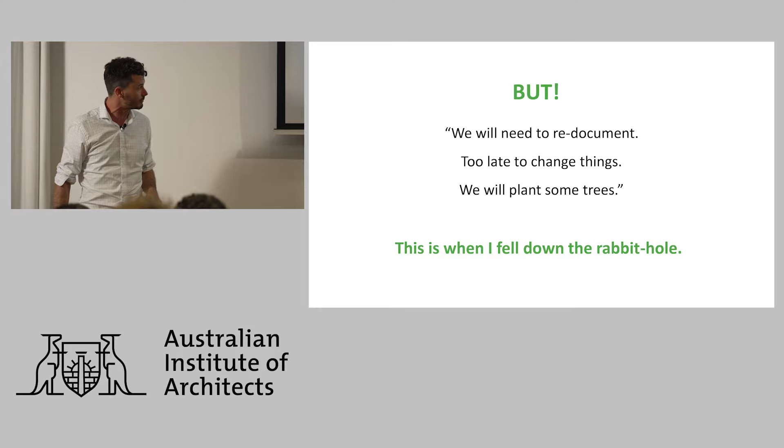And that was where I fell down the hole properly, thinking, okay, there is a problem here systemically with an architectural firm who was interested in environmental stuff, a client who was engaged with it, the builder was engaged with it, and yet we ran into that hurdle.

Cut through to where we are now. I started Carbon Trace last year off the back of that carbon nerding that had been rattling around in my head for 5 years. And where I'm up to now is how you build the link between embodied carbon or greenness and the financial sector. Once you start to connect dollars with greenness, you really have a starting point.

So today I'll talk about the live solutions and what you can do as a designer, and report on the optimistic progress from down the bottom of a hole, which some of you hopefully come down the hole. It's a great place, but it can be pretty overwhelming. So come up for air every now and then, otherwise you'll end up talking with Ross at the Perth Design Week.

So I'd just like to start by saying the commercial sector and the residential sector are different beasts. And we've heard the rest of the series has been commercial sector focused. I am a residential builder building 1A, like one-off homes, and that is a bit of embodied carbon that really needs to be talked about and come to the front of the conversation, because it is getting left behind.

And it is the urban sprawl and the mum and dad home is a very different paradigm to a project where there is a consultancy team, where there's a whole lot of backup and resource and energy, when it's just you as a designer, a project, an Excel document, and the web to get your embodied carbon modelling done. It is fundamentally a different landscape.

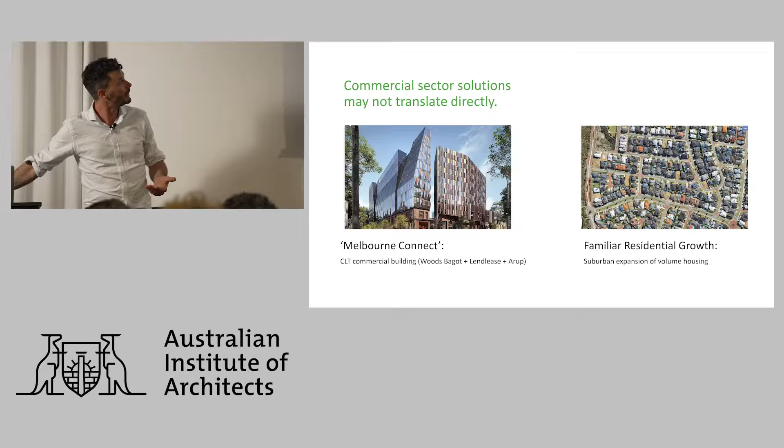1A building stock. We need to build 200,000 homes every year for the next 5 years to reach our housing shortage goals. It's a sector that's dominated by fairly low sophisticated organisations potentially, tradespeople. There's white collar, there's blue collar, and there's no collar, as I affectionately refer to some of the builders that I've worked with. There's also a fundamental difference in that suburban homes or 1A stock broadly has a fairly common typology repeat, particularly in that volume space.

From a bang for buck point of view, this humble home is a different beast to the architectural one, but actually this is what's doing the damage. Our little architectural world has got a percentage of it, and architectural design has a great need to really push the boundary in an embodied carbon space. However, you need scalable ideas and solutions that engage everyone, rather than just a cottage industry of hardcore LCA analysis of a few things. You need to get the whole world talking about this. So within the residential sector, there is a sector within a sector.

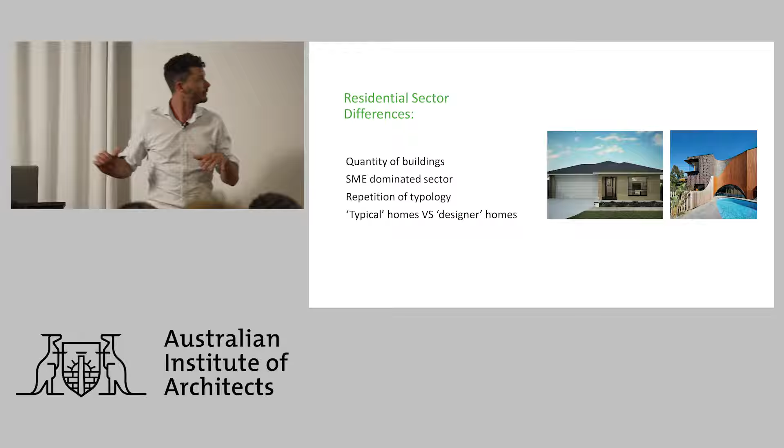The need to measure - if I'm a carbon nerd, Ross is a measurement nerd, and I think that's a good, happy place to be. Measurement is a design tool. Design is a series of compromises, and unless you have measurement as a tool, you can't make informed decisions, particularly when it comes down to embodied carbon and therefore cost. We really need to be measuring embodied carbon, and that's what this series is all about.

Rules of thumb are great and have been around since we've been building homes, but they need to be backed up with numbers and a metric. At a very high level, embodied carbon, our carbon footprint, and LCA analysis - modules A1 to A5, B, C, D - that's great. What it comes down to is how much stuff have you got and what's the impact of the stuff. Stick those two bits together, and that's where you get to your impact, your embodied carbon.

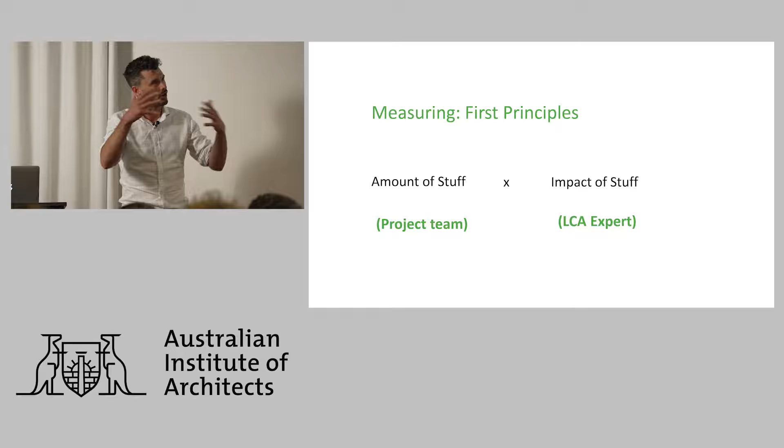When it gets really complicated and confusing, I find dumb builder's logic - work out how much stuff you're using and then the emissions of each bit - is a way to bring it back down to earth. The amount of stuff in a building is very much the domain of the designer. Understanding the impact of the stuff and the intricacies of system boundary - what's going to happen to the project in 50 years in landfill - is relevant subject matter, but that's the realm of the expert, the specialist.

I think we have to appreciate that as designers or builders and practitioners, we should focus on what we're good at and capable of doing really well, which is measuring the amount of stuff in buildings. And that's certainly where I began my journey.

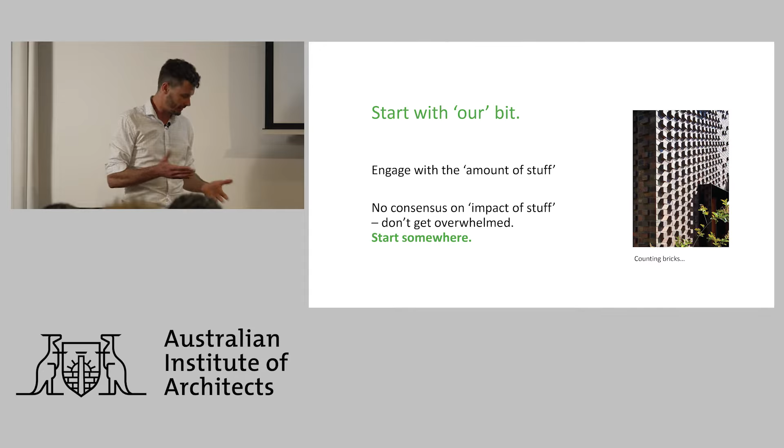Literally count bricks. In the embodied carbon world, where no one can agree on how much carbon impact a brick has, or a cubic metre of timber, that is all totally elastic. The only real truth is that there are X number of bricks in a home, X amount of concrete, and 400 lineal metres of flooring - those hard points form the foundation of measurement.

From that, you can apply your impact factors and start to get down to the landscape of how you factor in recycling. But sometimes don't get overwhelmed - it is just about the amount of stuff.

There's also the idea of designing out carbon rather than specifying out carbon. Designing is the bit where the fat red pen and the crayons are out - that's where the big savings are made. Specifying out later by dropping in low carbon concrete is great, excellent, has to happen, but that should be a secondary consideration. I think the key is early design decisions.

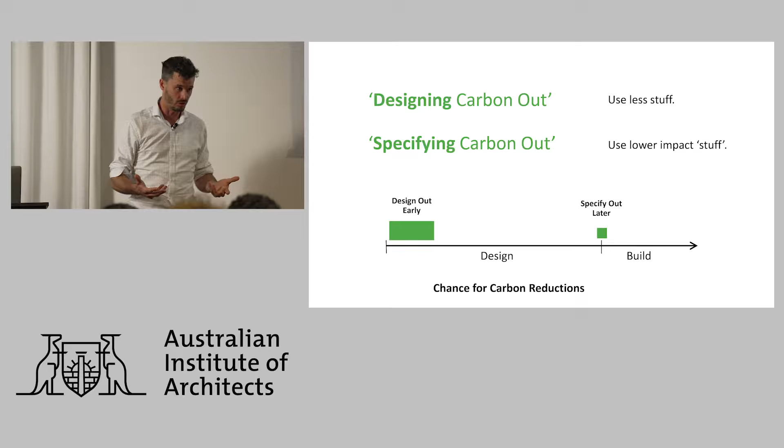That ties back to where I started in 2019, asking: have we thought about a screw pile solution to a site here? From a build point of view, that was great because we were next to adjacent footings and avoided underpinning and all that. But how can you start to engage at that feasibility stage with the implications that might come about from one decision over another?

This mimics the commercial sector paradigm - the structural system, the outside of it, the footings, the envelope, is doing the guts of the work. If you start by measuring concrete, steel and masonry and get the outside of a residential building calculated, you're 60% of the way there. You can get really lost really quickly when you start trying to work out how many litres of paint are in a room, how many coats they put on - you can really get down the hole quickly.

That's great, and that's the role of an LCA analysis conducted fully and comprehensively, but that's not a scalable analysis mode. Where I've ended up in my journey is saying, let's pick up the big stuff first, the low-hanging fruit, the stuff we can get our hands on, and then worry about the finer detail later.

From a designer's point of view, if measuring is the key and understanding how much material is in a project, then it's about having access to that measurement at a very early stage so you can make those decisions with real numbers. I think it's of less significance to get to the end of the project, building's about to start, and say now we'll do an analysis, we can do full takeoffs and work out how much material there is. Actually, we've missed the boat, and those decisions have flown the coop.

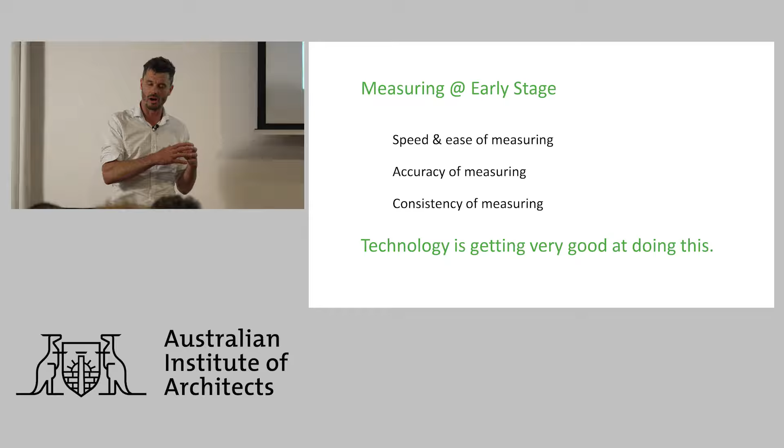So the challenge for designers is how do you have a data flow of relevant, project-specific material quantity at a very early stage. When a design has to be dynamic, you have to have that fat red pen going. How can it be accurate? And more importantly, how can you be looking outside of your office and saying, hey, here's the measurement we get. What do they get? What do they get?

Because if 10 people are measuring buildings in different ways, getting different results because they're measuring in different analysis modes or with different emission factors, suddenly you start to undermine the credibility of what it is you've done. You get 10 different answers - well, which one's right? It may be that none of them are right or wrong, but depending on how zoomed in you get on the analysis mode, you might get very different results.

So what we've come to realise is technology is getting good at measuring at an early stage, and we've been trying to leverage that through CarbonTrace, which started off as a bill of quantities tool for early-stage optioneering, allowing designers to see, actually on this job, because the soil's rubbish, because we're in Brunswick and it's 3 generations of rubbish tip before we get into clay, screw piles would be a really good idea here rather than digging 1200 mil. So that's where it started.

The way it worked essentially is design teams would put in very rudimentary building envelope values, floor plate, wall area, and get a carbon output for different structural types and material types. What happens if you change from brick veneer to weatherboard? Bang, 2 seconds, there's an output. All right, well, I'll put that in my little red pen.

We evolved that to realise we could run that from a NatHERS certificate. For those who aren't aware, a NatHERS certificate is a mandatory part of a building permit. You get an energy consultant to prepare a certificate that says your building envelope is compliant with the National Construction Code, got enough insulation, and so forth. A NatHERS certificate will basically measure heat flow through the envelope of a building to see how warm or cold the building is. Sweet.

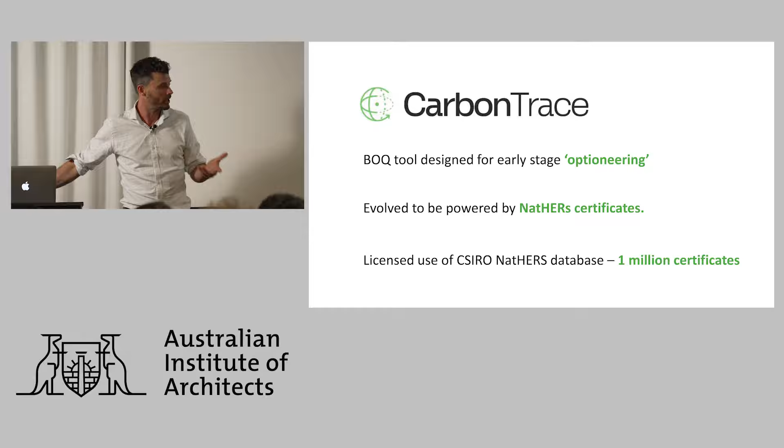project-specific data. We went to CSIRO and said, hey, we've got this thing. And they said, oh, this is pretty interesting. And then we entered a license agreement to process every NatHERS certificate that has been produced. So that's 6 years of data, 1 million data points, and we ran them all through our algorithm.

What that got us to dial into is this - each grey dot is a postcode, and behind those postcodes sits that 1 million data points of property information. From that we plotted, and our algorithm plots out intensity per square metre against the area of the house. You can see here, this is a 70 square metre house, and it's got a really low embodied carbon intensity. There's a few real bangers up the top there, and the guy who did that one's in trouble. But the point is, you can start to see, that's 1 million data points.

That's every home built in the last 6 years, splattered out on a graph, which means you can start to plot the average. Once you know the average, you've got a benchmark. Then you can say, all right, if we're just analysing with a NatHERS scope, I know my building is here. And that's my NatHERS certificate compared in exactly the same way to 1 million other NatHERS certificates.

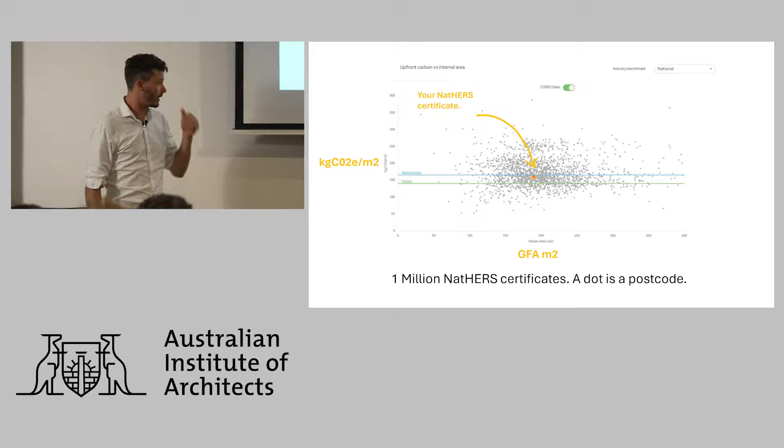And that then means you've got a way from a designer, and the way the tool works is you play around with very basic stuff. This is the low literacy stuff, trying to make it accessible to everyone. You play around with these features and you get performance shifts.

Too deep. So you play around, you can drop down with, again, the commonplace wall types, ground floor structures, roof, and all the various material groups. You can change the suppliers, and that's got some EPDs behind it with low carbon concrete, low carbon brick, and what have you. And then you modify those, and I'll show you on the next slide.

There's a button where you calculate, and it will spit out a hotspot analysis, and it'll give you an absolute value derived from that NatHERS certificate. You fiddle around with these numbers, press it, and you start to see a metric change.

Maybe better explain an EPD as well, because not everybody will know what that is. You're right, I'm too nerdy for this. So an EPD is a...

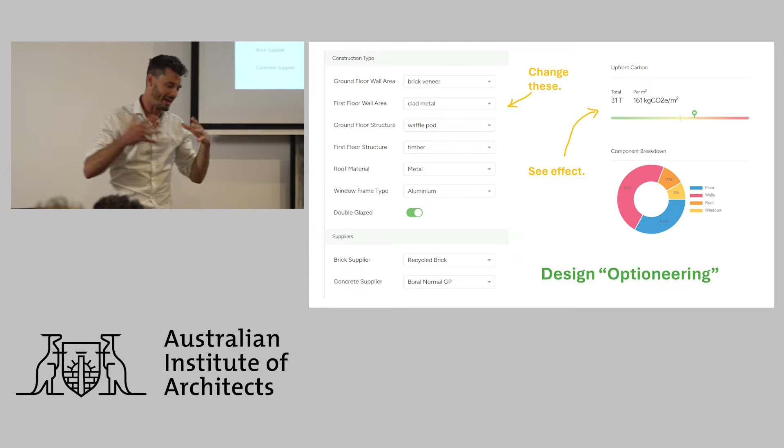Way of measuring the carbon impact of a particular material that's been prepared by, say, a concrete supplier. They will analyse their particular concrete blend and say this has got an impact factor of 300 kilos of CO2 for every cubic metre of this concrete that we sell.

And lots of suppliers are starting to get on board with producing lots of EPDs, and we're using that so you can, if you start to play around and use one of Boral's alternative mixes, it has a different emissions factor. So it can show you what's starting to happen if you change suppliers. It stands for Environmental Product Declaration. That's the short answer to EPD.

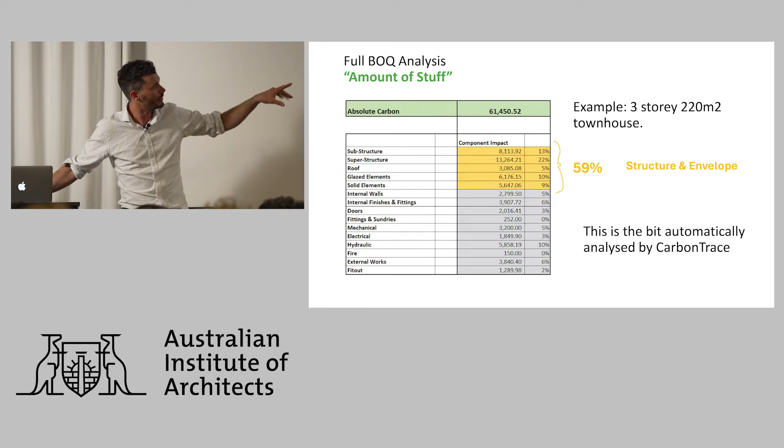We did a full analysis to see how much of a NatHERS certificate we were picking up. And again, it's sort of aligning with that commercial story, which is we're getting the guts of it in that superstructure and that external facade system. And that's the bit which CarbonTrace is doing. So a NatHERS certificate will give you an LCA analysis on any building type with a NatHERS certificate.

Does it work on the really unglamorous bit of the building stock? Because theoretically, an architect should be able to get a client to get an LCA consultant on board, do a full analysis, no worries there.

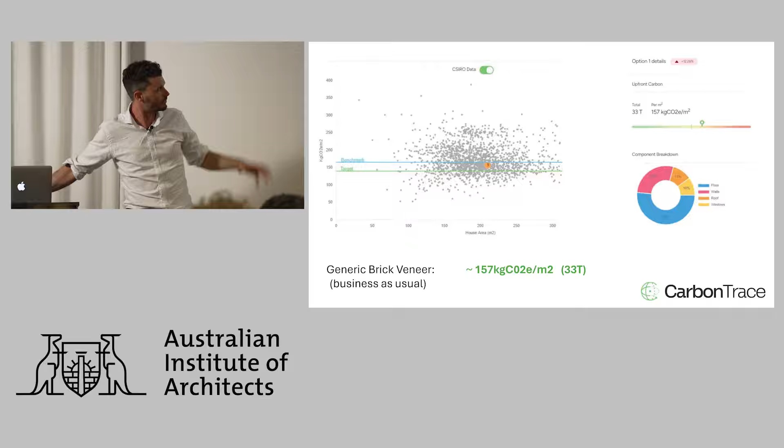If I change from brick veneer to metal clad, I've essentially removed the brick bit of the equation. Brick is a relatively high intensity thermal mass embodied carbon product. So let's get that out of the equation for now.

Change to metal clad, and you can see that there's a shift. And if you change to fibro or timber, it equivalently maps that, and you literally see your orange dot start to move in a downward direction. You change from waffle pod to strip footings, that is, you're getting a lot of the concrete out of the job, you're starting to see it drop right down.

That should be triggering all of the design questions you should have. Why are we going strip footings? Why wouldn't we? Why would we go concrete? Why wouldn't we? But at least you've got some numbers and you can see there's actual material change in those big decisions, which you might otherwise just be like, oh yeah, waffle pod, no questions asked.

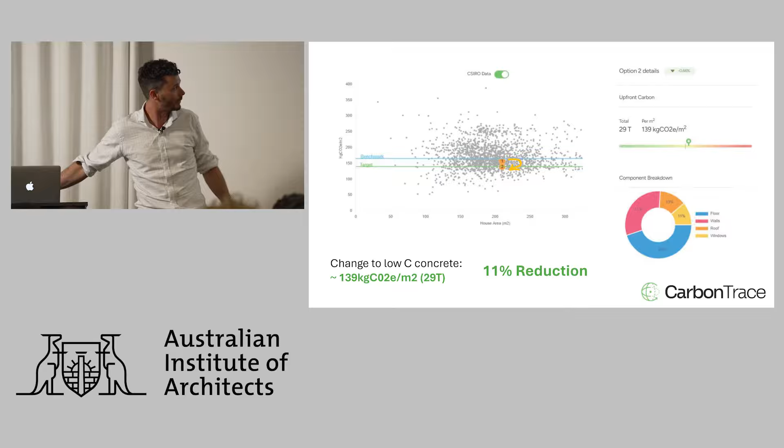If you don't want to change anything, you want to keep it really simple, you just want to change supplier. If you change to a low carbon concrete, a 30% blend, that was, I think, what John was talking about, you'll get a 10% reduction. That's a phone call, and that's dropping in the specification. We either want this supplier, or it might be, we don't care which supplier, but they need to have an emissions factor of X, and you work out what that is. And that's where EPD data comes in.

You do the same thing for brick, keeping your brick veneer on a waffle slab, but you've changed to a low carbon brick supplier. You've asked the question of the supplier, and they've said, oh, I don't know, do we have an EPD?

Those sort of things are going to come out of it, which is great, because you're then extending the conversation beyond our little world. And if you push those questions up the supply chain, that's how change happens more broadly.

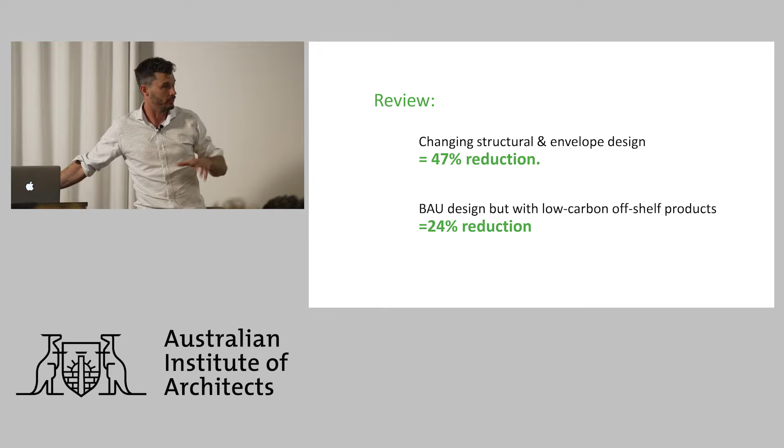So the takeaway from that is fiddle around with the structure and the envelope, because that's the big ticket items, and you can do that quite quickly for serious, meaningful results. You can also start to change specification if you want to do nothing else, and that'll help. I think the literacy was the key thing there.

But I want to talk now, and this I need to see - how are we going for time, Ross? Okay.

There's a reason why measuring has become relevant, and it's no longer just us thinking, yes, we want to build low carbon, yes, I've got my little goals and my little Excel spreadsheet. There are two things which fill me with great hope that big progress is happening in the short term.

The first of them is mandatory corporate reporting is changing. That means big businesses, that means banks, that means developers. The big end of town is now mandated to report on their scope 1, 2 and 3 emissions.

Now what that means in real terms - I'll zoom out - scope 1, 2, 3 are your organisational carbon impacts, I suppose. Scope 1 and 2 is pretty easy: how much diesel do you use and how much power do you buy? And scope 3 is everything else.

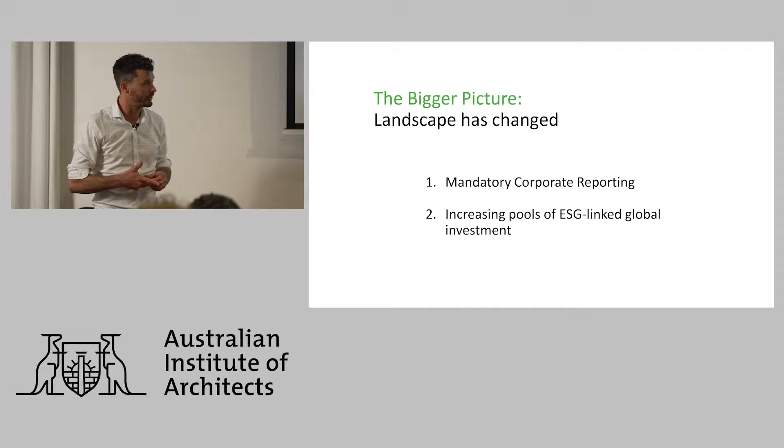And for banks, part of the everything else is anyone they lend money to is their problem. They have to report on that, their loaned emissions, in a particular way. Same with anyone else attached to building - volume builders, the big guys, the developers - they are all now having their board report on embodied carbon in the same way they have to report on their financials.

And if they get that wrong, they get sued. So corporate boards are getting very worried about how they are going to approach scope 3 reporting, which is essentially - let's use them interchangeably here - scope 3 is embodied carbon.

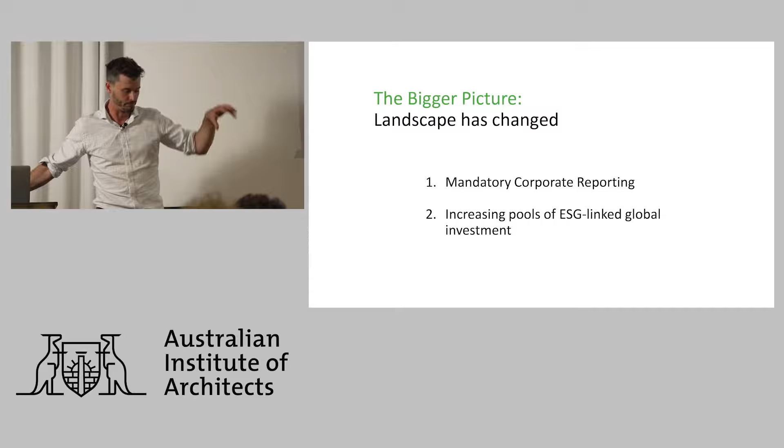And the second big thing is there are lots and lots of pots of investment funds that have big bundles of money that can only be spent on green projects. I'll talk on both these things in more detail in these two slides.

So embodied carbon reporting is coming next year, might get pushed to 2026. Read that guide, it's a ripper. And if any director of a big organisation hasn't read it, they should.

Essentially, the big end of town has to get their heads around numbers now. They are liable, they need to measure. Now, they're not in the business of building homes, they don't know anything about it, they don't have any data, they're not close to any bit of information about embodied carbon. This is why they're worried, because there is not a data flow at the moment of scaled embodied carbon information going up the food chain.

So they're worried. And the second bit of the equation is the green bonds. This blew my head a little while ago, and it did take me a while to digest, so apologies, this is a dump. But there it is, you're all smart.

You'll work it out. Green bonds - our super funds, institutional investors are being told by their members: do not invest in fossil fuels, invest in sustainability projects. Super funds are saying, all right, that's what they want, that's what we'll do. So they've now got big bits of money that they cannot invest in anything other than sustainability. And these pots of money are getting bigger because more people are asking for this sort of investment. This green bond market, as opposed to a normal vanilla bond market, is changing altogether.

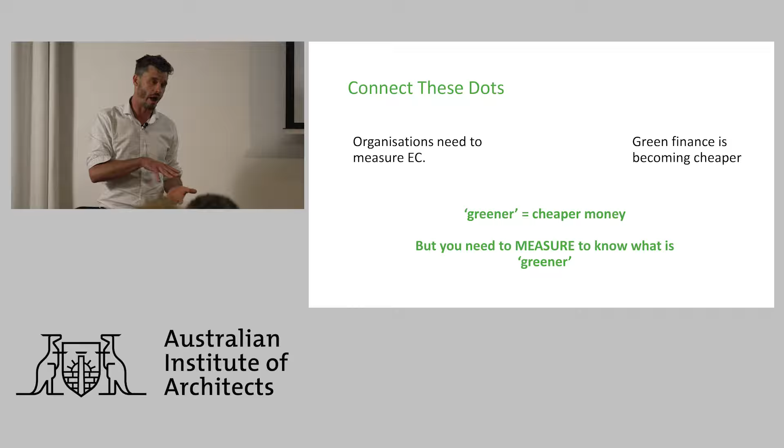And that's my next slide. Most importantly, you have to be able to measure it in a way that the banks can audit it. It has to be robust data, it has to be consistent, it has to have a methodology that will stand up to interrogation from ASIC, the guys that look after all the big companies, because they're going to be the guys saying, hey, is that greenwashing? Are you sure that's greener? And if they're wrong and they're making a claim like this is heaps greener than it was, and they don't have a methodology behind it, that's a big problem. Greenwashing is going to be the next big ticket item, I think.

And what that's looking like is at the top end of town, banks have realised, hey, if we can measure that the projects we're loaning money to build are greener, we can borrow greener, cheaper money for that little package of projects. And with that money, well, we got a few more profits. I know banks have got their back against the wall, they're really skint, but maybe they could stretch it and expand their green loans offering.

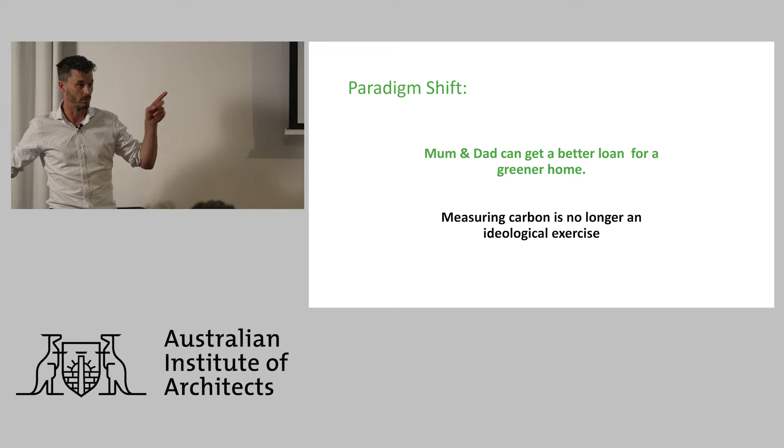So ultimately mum and dad get a better mortgage because they've said this home is the one we want, and we want it because it's greener. And we know that if we can get - this is back to our NatHERS thing - this is our project here. Hey bank, we've shown you that we're 30% below, we're performing better than the rest of the country by 30%. That aligns with the eligibility criteria of a global metric called the Climate Bonds Initiative - write that one down, that's a really good one to know about. Which means, hey designer, if you can get us in this green bit, we can go to the banks and we've got a way of proving that we're a greener home. And that means the banks are like, okay, you beauty, we'll put you in our green pot and we can get some better money for that, and then hopefully that gets passed on to mum and dad.

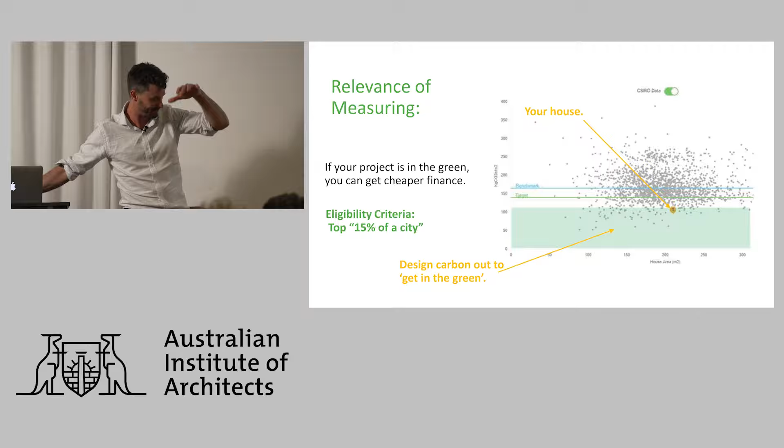So I think the main thing - and apologies because this was a segue off measuring, but really relevant to contextualise the meaning and the reason to measure - it does all start with the nuts and bolts, it does all start with counting bricks. Don't get too overwhelmed because it's easy to just turn off and be like, this is not core business, I'll worry about it when I have to. The reality is the have-to bit is now for the big end of town. So businesses are now saying, hey, I can be a better business, I can make more money as a lower tier business if I am ready to engage with the needs of these upper tier corporate organisations. So it's shifting from ideology to dollars, which is what's going to turn everything on.

So yeah, quantify the carbon impacts. If, as a designer, just start measuring bricks, concrete, steel - not at a cost level, just how much physical material am I putting in. Then dip your toe in the EPD world. Then ask the question about what do I think about carbon offsets, what do I think about biogenic carbon, what do I think about end-of-life recycling. Have all of those big questions, but start somewhere easy. Don't try and boil the ocean, just do something and start somewhere. Thanks for listening, apologies.

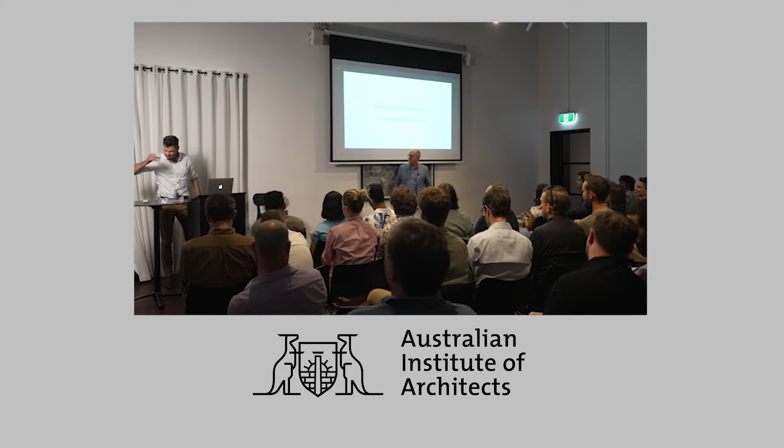Well, that got serious, didn't it? Very grown up. Starting with a small house building enterprise and ending up in the world of green bonds and financing and all the rest of it - quite a trajectory for a young man. See what you can do with one million data points, crikey, and build a whole new world on the basis of it. Well, that was fantastic, thanks Tom.

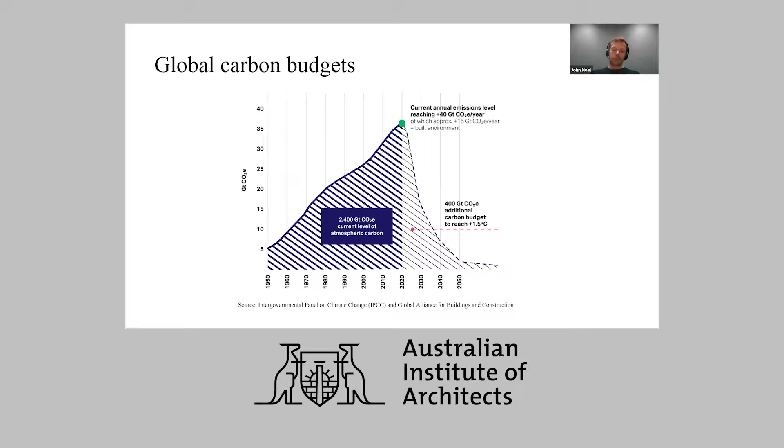The construction industry, as most of you will know, is a significant emitter. We're responsible for approximately 40% of emissions globally, and that's broken down into building materials and construction at about 11%, with the rest made up of buildings operation, so 28% plus 11, roughly about 40, which is significant.

If we look at how that's broken down between embodied carbon and operational carbon, we'll explain the difference for anyone who may not know. Currently, and it depends on the source, but according to Arup a few years ago in 2019, the breakdown was approximately 16% for embodied emissions and 84% attributed to the operation of buildings. That's very likely to change significantly as the grids clean up and operational systems become more efficient. We're looking at a projection, again by Arup, by 2050 of reversing that.

So 85% sitting in embodied carbon versus 15% for operational. That means embodied carbon, which was for a long time the elephant in the room that wasn't being addressed because operational carbon was a larger piece of the pie, is now being actioned. That reveals the embodied carbon volume, which needs to grow relatively in terms of percentage, and there's a huge potential there for reductions. As a structural engineer talking to you about carbon reductions, that's predominantly what I'm going to be focusing on today: embodied carbon.

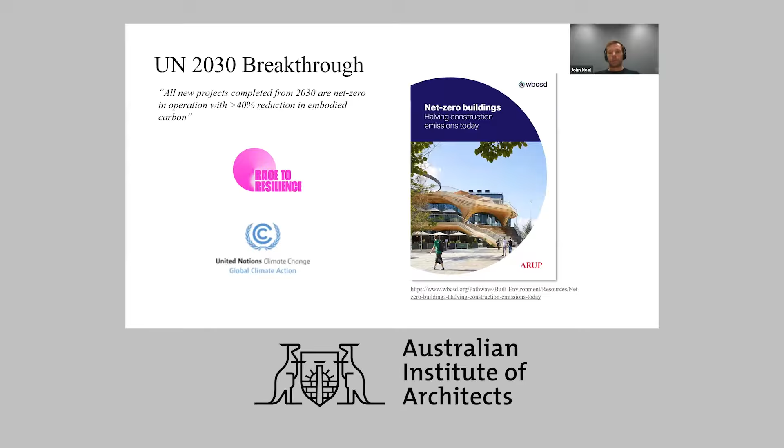At COP27, Arup made a public commitment in conjunction with a number of other bodies, Race to Resilience, under the umbrella of the United Nations, or this broader UN 2030 breakthrough group. We made the commitment that all our new projects completed from 2030 will be net zero in operation with at least a 40% reduction in embodied carbon. That's very much to try to meet the demand for that curve reversal I first showed, halving our emissions by 2030 and getting to net zero by 2050. Along with that commitment, we issued, in partnership with the World Business Council for Sustainable Development, a joint publication called Net Zero Buildings: Halving Construction Emissions Today.

I won't go into too much detail other than focusing on A1 to A5, the product and construction stages. I might as well break them down now. A1 is raw material supply, A2 material transport, A3 manufacturing - so it's all the energy and therefore emissions associated with those processes. Then under construction, A4 is product transport, and A5 is construction and installation. That's an internationally recognized standard, so if we all talk the same language, we can agree or disagree on quantities, but at least the framework is consistent.

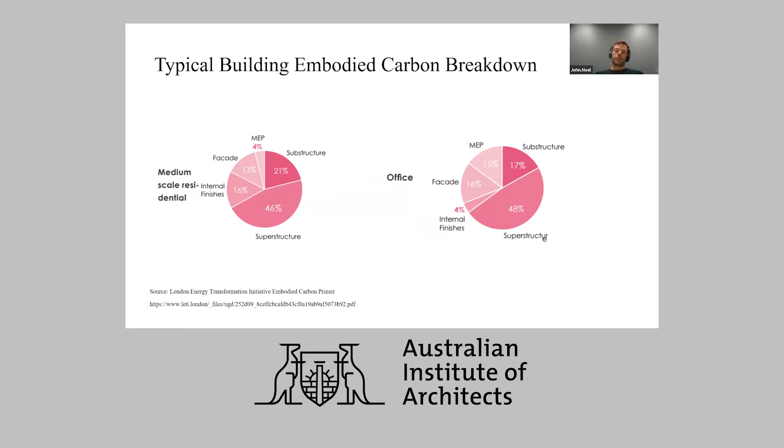So where does that carbon come from? Well, mostly from the production of the materials that make up the elements that we use in construction. Steel contributes to about 6% of the world's greenhouse gas emissions. And if we look at where those emissions occur, there's emissions associated with mining or procuring recycled steel, but the bulk of the emissions sit with the process of manufacturing the steel. So if you're using a basic oxygen furnace, the chemical reaction and the fact that you're heating up the steel.

That's the energy hungry process, and that's where most of the emissions can be attributed to. If you're using an electric arc furnace into which you feed recycled steel, that's typically 50% more efficient, but it is still energy intensive, and then the rest is made up of transit, use, end of life. Just back to the basic oxygen furnace versus EAF: in Australia and worldwide, it's about 70% for basic oxygen furnace production, and about 30% for electric arc.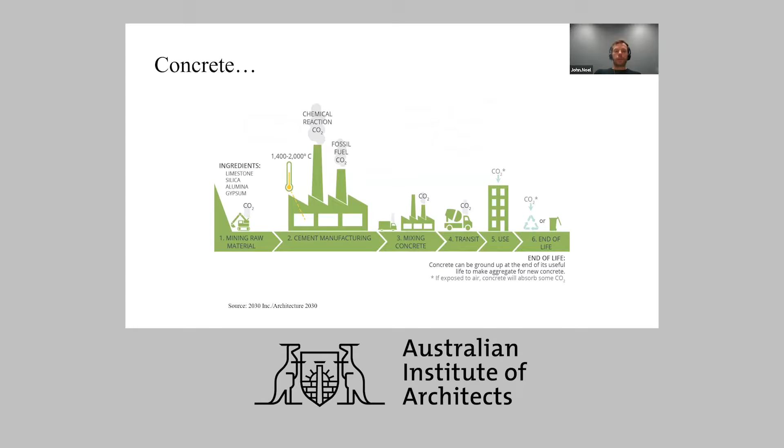Timber. Well, timber's very different in that it sequesters CO2, as you probably all know. So it's a carbon sink, but then through the life of getting from the tree to the engineering product, you have to log, you have to take it to the manufacturing facility, you have to transform it, then transport it to site, erect it, so that there's energy and carbon associated with all those processes. So the logging, mill residue, biomass, and fossil fuel from the manufacturing all add up, but they still don't add up to more than the amount of CO2 that's sequestered within the timber. We'll talk about that equation a little bit later, but that's obviously the fundamental difference between the three typical materials that make up a structure: steel, concrete, and timber.

So what are the reduction strategies that we can employ to halve our embodied carbon emissions? The first one we tend to use is one that's suggested by the Institution of Structural Engineers. It's a very simple diagram or process. It's basically to use less stuff, and I'll expand on that in a second. That's your primary focus. Once you've exhausted all those avenues, then you specify low carbon materials. And once you've exhausted that, you offset as the absolute last resort.

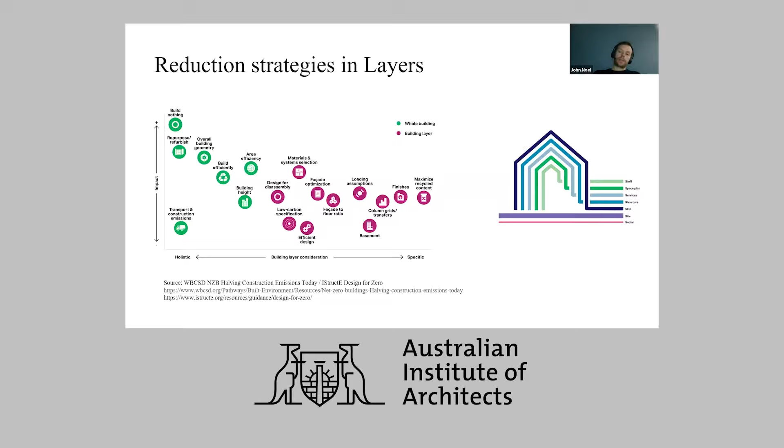You'll see that the 'build nothing' question, of course, has the highest impact in terms of reducing your embodied carbon. It is confronting for a profession that makes a living from building things or designing things to be built, but I'll show you an example of where we worked very hard to eventually build nothing. That's a fantastic result if you can do that. I think the rest is self-explanatory as you move away from that and start to look at repurposing, or building efficiently, or looking at your building height or area efficiencies. Then the impact diminishes, and it gets more and more granular. You start looking at design for disassembly, looking at the different layers. Those same reduction strategies then in time.

So there's certain questions, you don't wait for the contractor to be on board to ask, can we build nothing? That's what we're saying here. But you can ask relevant questions at every stage. So you get to construction and ask, how can we build leaner, for example.

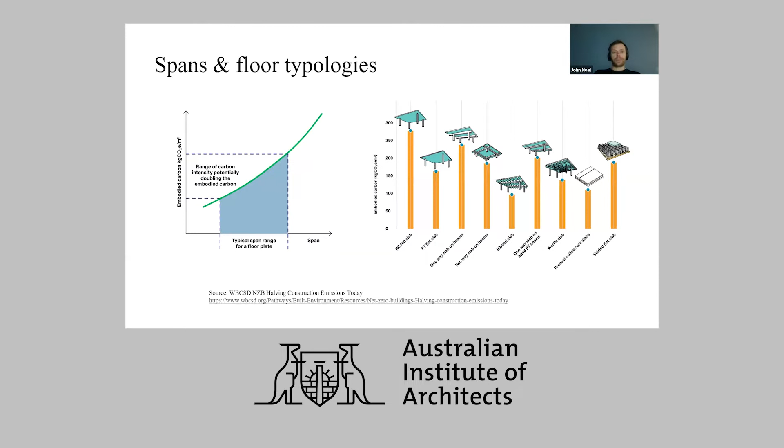Design efficiently - this is about maximizing utilization of elements, interrogating the serviceability criteria to make sure the response is appropriate. So looking at facades or internal partitions, long span beams and deflection, dynamic criteria, crack width requirements, etc. Using bespoke criteria as opposed to generic. Refining the loading criteria and designing for use now and strengthening if use changes later. I'll show you examples of this in a second.

What I won't talk about today is low carbon concrete, because typically that tends to be the default - let's reduce embodied carbon by specifying low carbon concrete. Of course we can do that, and we do on projects, and I could do a whole presentation on where we're doing that very successfully. But my message to you today is that there are many things you can do before you get to that point, and that point should be the last on your list.

And is timber the silver bullet? Well, it depends. It's a very complicated graph, and we could spend probably the rest of the presentation unpacking this. This is again taken from that publication, and there are detailed explanations as to what this all means. But the big picture message here is that timber used inefficiently - and I think we can all think of buildings where a lot of timber has been used possibly inefficiently - the carbon story is not necessarily as good as you might think.

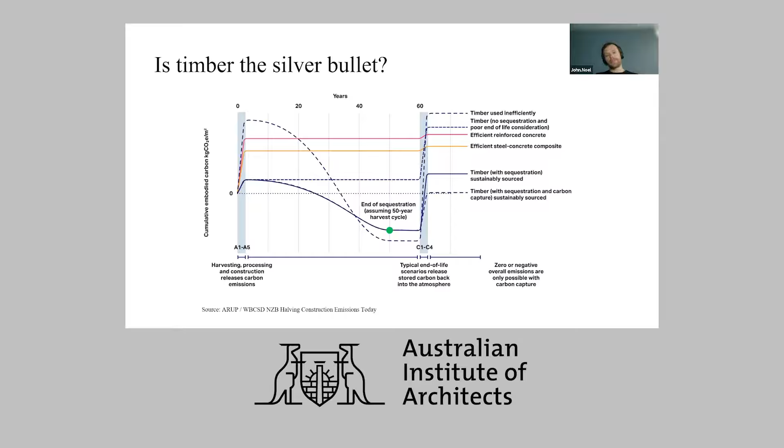So my message here is that timber is fantastic, but it needs to be caveated. It needs to be used efficiently as a material, and the considerations for sequestration and end of life need to be very well understood for that carbon accounting piece.

Okay, so let me move into some practical examples. How do we influence the brief? Day one, blank sheet, sitting down with the client. In this case, I can't tell you the name, but it's a hospital in New South Wales. It was the base case for future hospital developments in New South Wales, looking at how we can brief the embodied carbon associated with the structure.

So we did a whole bunch of benchmarking, looking at current designs, and then produced a list. This is one extract of a very long report. I don't expect you to read the text there, but I'll pick a couple of examples to show you measures that we're suggesting.

So typically 30% SCM, Portland cement replacement, was used. If you go from 30 to 40%, that's a 2% reduction in structure overall. Sounds like nothing, but it all adds up.

For example, switch to bubble deck for suspended floors, and you get a 6% reduction in structure, 3.4% carbon reduction overall, all the way to some very aggressive use of calcined clays for all concrete. That's not mature yet, but in the future, 5 to 10 years down the line, it's likely to be mature enough that we can use that in Australia, and you're talking about a 25% reduction there for structure alone.

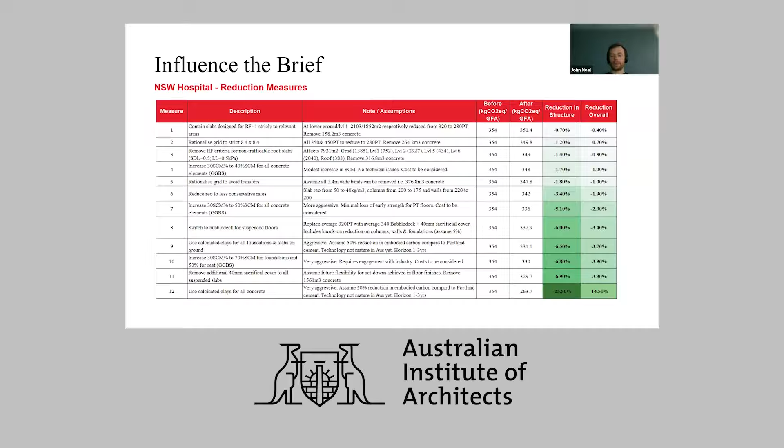Build nothing. This is an example where, for the La Trobe campus, La Trobe University here in Victoria, in Bendigo, we looked at a couple of buildings about 50 years old, constructed in the 70s. The university thought they'd come to the end of their useful life. There was a full audit of the structure carried out that we inherited, and we were asked to come up with scenarios: demolish and rebuild, refurbish, or demolish and do nothing and create a park, decanting the population from those buildings elsewhere on the site. And we put a lot of science into looking at those different options.

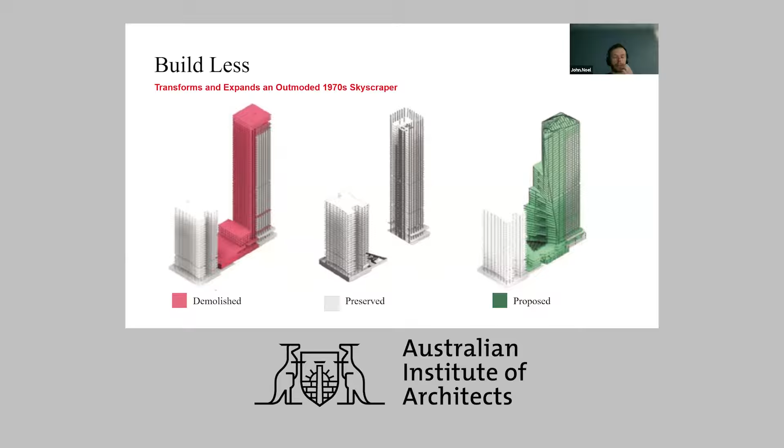Probably familiar with this one, Quay Quarter Tower in Sydney. This is a 1970s skyscraper where we demolished part of the existing structure, retained a large proportion, and then redeveloped the land where most of the demolition had occurred.

That old building was no longer attractive to tenants and had small floor plates, hence the project requirement to increase the floor area. It went from 50,000 square meters to almost 90,000, but 68% of the existing structure was retained in that process, and in doing so we saved 12,000 metric tons of embodied carbon.

If you put that in airplane numbers, that's many, many trips, Sydney to London, just to give you an example. I won't go into too much detail here.

I'm going to expand a little bit more on this one. This is an illustration of Build Clever. It's a project in London, 18 Blackfriars, a large commercial tower.

The first thing we did was to benchmark. The idea was to use embodied carbon targets as the driver for most of the decisions across the project, but before we did, we had to agree on what those targets were. So we benchmarked. The Greater London Authority has some benchmarks and some aspirational targets.

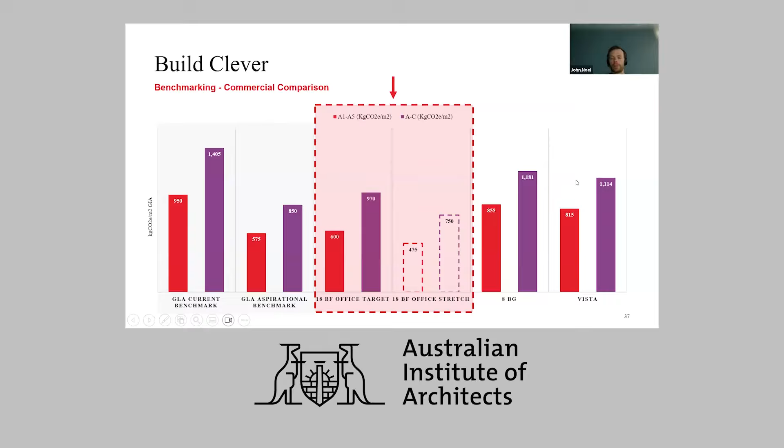Where the project landed was close to the GLA aspirational benchmarks, with a stretch target that brought us below that, which was definitely state of the art in terms of carbon per square meter, especially compared to other recent developments.

That benchmark for overall carbon then translated for structure to about 315 kilograms of CO2 equivalent per square meter, and we were able to break that down into the different components, looking at the aspirational targets and what that meant per element.

From this, we were able to improve incrementally to reduce carbon, but it has to be done from day one and holistically. It's a 210 meter tall tower, 48 floors. It's London, so it's a constrained site - there's a BT tunnel in the substructure, for example.

But essentially, the carbon targets led the design. Because the floor plates represent a large proportion of the carbon budget, it was essential that reduction was maximized, transfers were minimized in the structure, and the massing of the building was such that it led to efficiencies or carbon reductions by reducing the wind loads.

Looking at the floor plates, the target was 35 kilograms of steel per square meter, which is far less than best practice, sitting at about 50. To achieve that, we had to reduce the grid.

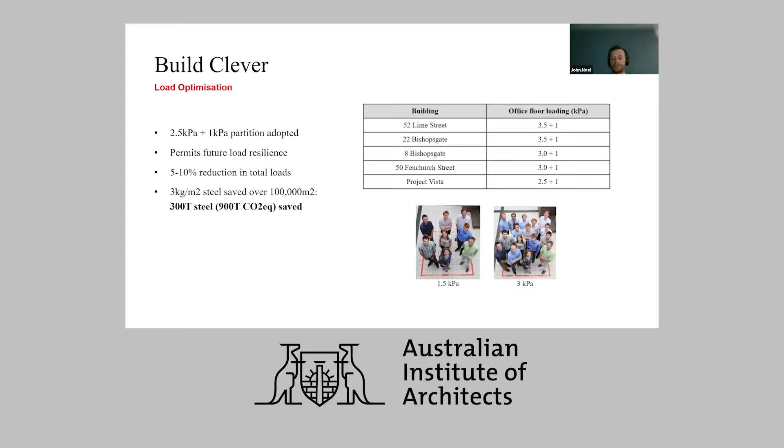Looking also at facade, the carbon budget drove a requirement of essentially 1.5 kilonewtons per square meter on elevation, which de facto eliminated precast or masonry facade. And that was the way the project functioned - the carbon budget drove the solutions.

That's a wrap on reducing embodied carbon - halving embodied carbon - and some practical examples as to how we're currently doing that on projects, honouring our commitment at Arup to reduce our embodied carbon by 40% on projects by 2030, which really means now, and how we're on that trajectory trying to bring our clients on that journey for net zero by 2050.

So thank you very much, and I hope you enjoy the next presentation and the conversation after that. Thank you.

First, a brief overview of what carbon emissions are for buildings and infrastructure. Whole life carbon emissions are the sum of operational carbon emissions - emissions associated with the operation of a building, like heating, power, and probably air conditioning in Australia - and embodied carbon, which are the emissions from the making, maintenance, and disposal of building materials.

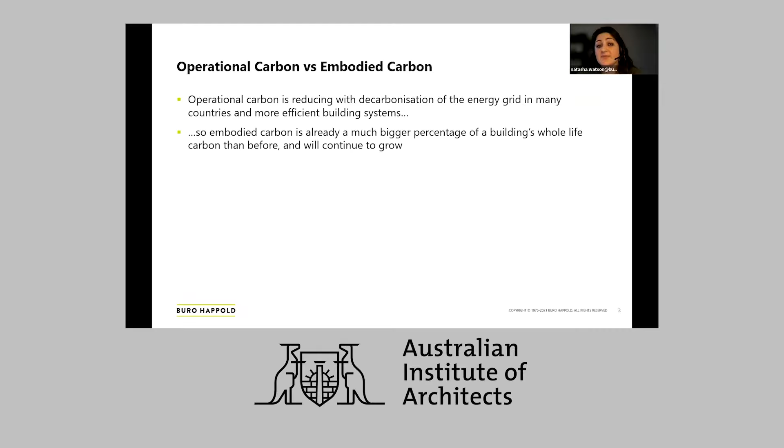When we look at operational and embodied carbon together, operational carbon emissions are reducing with the decarbonisation of our energy grids in many countries, and due to more efficient building systems. So embodied carbon is already a much bigger percentage of a building's whole life carbon than before, and it will only continue to grow.

Every ton of carbon we emit adds to global warming. If we look at global CO2 emissions to date, we've been producing around 1,773 gigatons of CO2 - that's from one source. We then have a remaining budget of 250 gigatons of CO2, and that's what we have remaining if we want to achieve a 1.5 degree increase in global temperatures in our future.

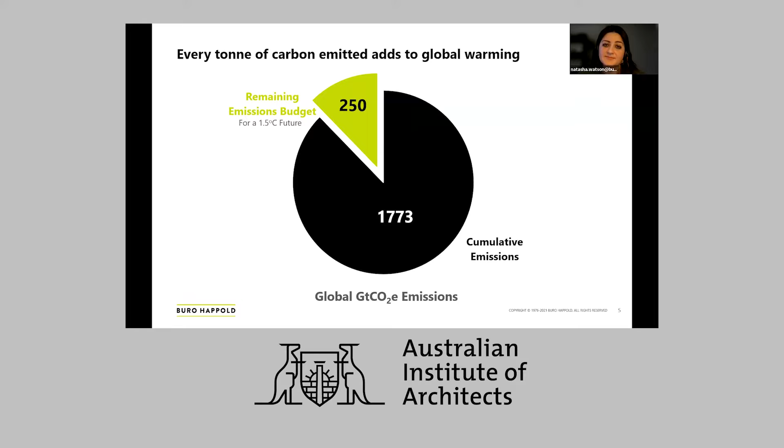So how do I actually reduce embodied carbon on my projects? First, we need to figure out where the embodied carbon is. This embodied carbon baseline emissions research was completed by the London Energy Transformation Initiative in 2020. A bunch of really eager engineers based around London, in many different engineering firms, figured out that approximately 60% of embodied carbon was attributed to structure.

Hence me, as a structural engineer, being very interested in this, because what I see is that structural engineers have a very big part to play in embodied carbon reduction. So we are going to focus on the design decisions that reduce embodied carbon.

To do this, we need to look at a conventional baseline building. This is the baseline building we drew up when we put together our sensitivity studies, a series of studies we produced for the Institution of Structural Engineers back in 2020. We looked at what we considered a conventional office building, which had a 9 meter by 9 meter grid, around 6 stories high at 4.2 meters floor to floor, four bays across, four bays deep.

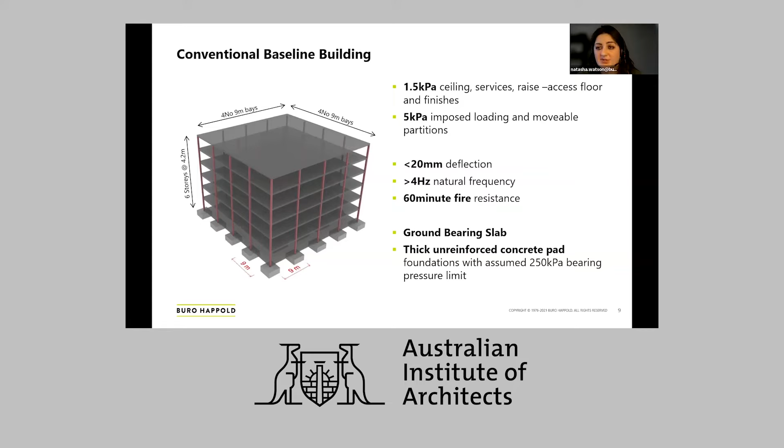Looking at this conventional baseline building, we considered 3 distinct forms. We had a look at concrete flat slab, composite slab on steel frame—that composite slab being a mixture of concrete topping on a metal deck, all on a steel frame.

And then we looked at a cross-laminated timber slab on a glue-laminated timber frame. With all of those assumptions and more, we came up with our baseline embodied carbon figures for these 3 forms: for the concrete flat slab, 349 kilograms of CO2e per meter squared; for the composite slab on steel frame, 269 kilograms of CO2e per meter squared; and for the cross-laminated timber and glulam frame, 180 kilograms of CO2 per meter squared.

So moving on to the first thing you can do to reduce the embodied carbon of your buildings: taking our 3 baselines, which had a 9x9 grid as we saw before, if we reduce those across all 3 options to 6.5 by 6.5 as the structural grid, we greatly reduce the embodied carbon. The concrete option goes from 349 to 236, the steel option drops to 228, and the timber option drops to 138.

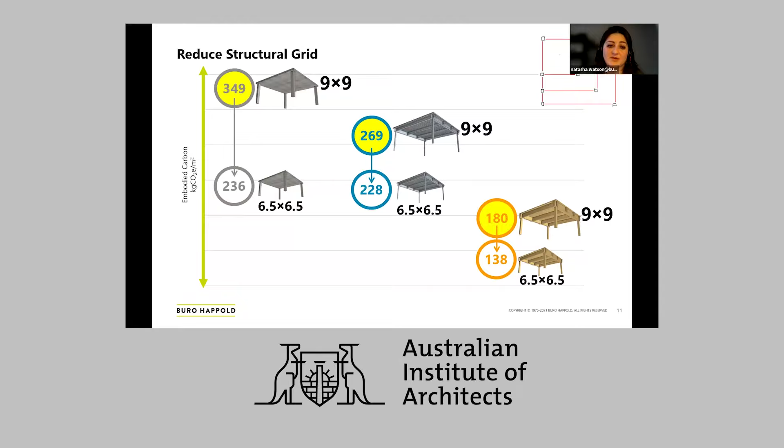Another thing you can do is question your imposed loading and serviceability. We had an assumed imposed load of 5 kPa for our 3 options, and if you can refine that to achieve 3 kPa across all the different options, you can also have significant reductions in embodied carbon. This doesn't mean designing in an unsafe way—it means really trying to define and refine the loading you're assuming in your building.

This can be done through discussing finishes with the project team early on, focusing on where key plant rooms will be located so we can add extra material in those areas but remove it elsewhere, so we can identify and realize the savings we can make.

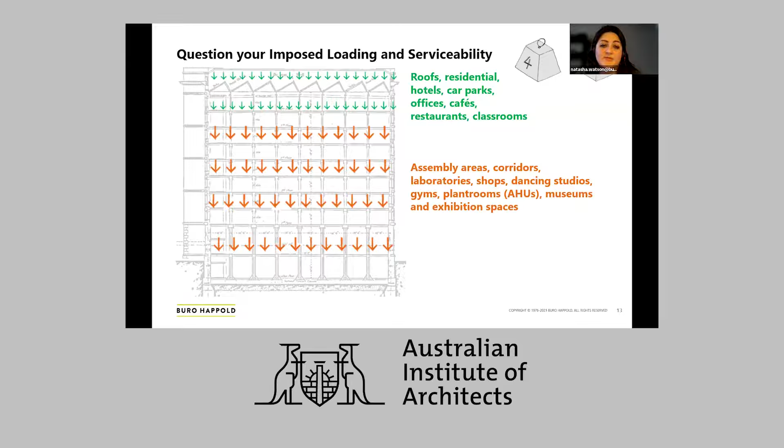Looking at imposed loading and serviceability, this leads to the idea that lighter-loading programs—things like residential uses, hotels, car parks, cafes—placed higher up in a building mean you're not overly loading your columns throughout the whole height of the building, and you can focus on slightly medium load requirements throughout the majority of the building.

But the key thing is making sure really heavy loading programs—things like heavy storage, server rooms, plant rooms with chillers and water tanks—stay on the ground. That's a good way of ensuring you're not putting excess material in due to not thinking through the program with embodied carbon in mind.

Also, one thing you can do is question adaptability. Typically, we think we need to put initial redundancy throughout the whole building—adding redundancy to columns and floor slabs—in case the use changes, say to a dance studio in the future, so you design the building with that possibility in mind.

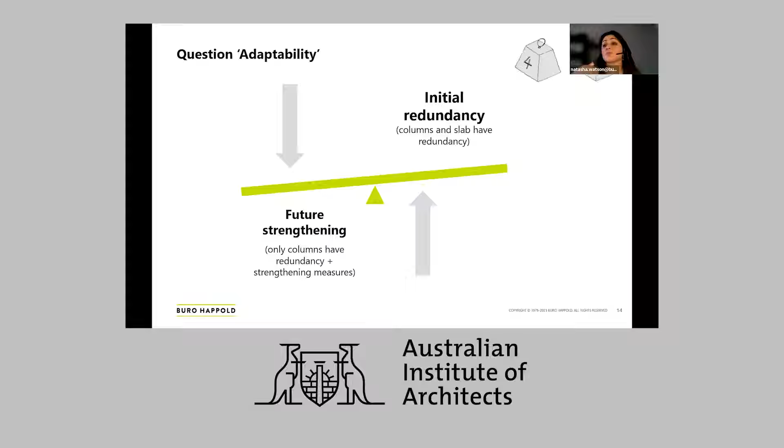When actually we should be designing for the use of the building as it is now, only putting redundancy in the columns but allowing space for strengthening measures within the slabs as and when a future change of use may happen.

If we look at putting initial redundancy into a standard concrete frame building, we've got around 349 kilograms of CO2e per meter squared. But if we design the columns to carry the initial redundancy they need, while designing the slab for the use it has now, and then add the embodied carbon you might need in the future for strengthening - in the case of concrete, this would be something like carbon fiber strips - you can save a significant amount of CO2 on your building, and also save in the future, because carbon fiber strips, when used appropriately, only add about 10 kilograms of CO2e per meter squared of the concrete building.

Another thing we can focus on is structural depth. Within the three options we had, we were looking at a concrete flat slab for the concrete option, universal beams for the steel option, which are an inefficient system anyway, and a cross-laminated timber, or CLT, deck for the timber option.

For the concrete and CLT options, we considered using a waffle slab, and also something called LVL on I-joists respectively, and those reduced the embodied carbon of those solutions. Within the concrete option, it reduced it significantly - around 50%. We also considered using universal columns as steel beams within the solution, and this drastically increased the embodied carbon of the steel option. A lot of the time we get pushed to really reduce the depth of beams within steel options specifically, and just to highlight how much of an impact this can have on embodied carbon, we wanted to demonstrate it here, rather than just showing how we can further reduce embodied carbon from a universal beam solution.

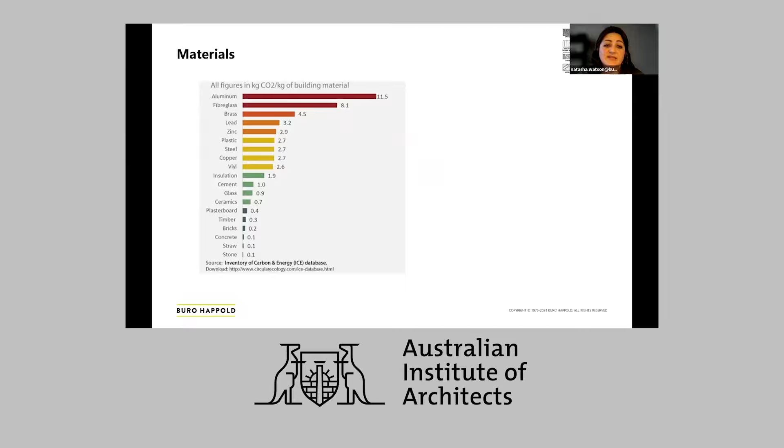But what we need to consider is that if you're using timber, steel, or concrete to span 7.5 meters for a given load, the timber option is actually the lowest embodied carbon because it weighs much less, even though it has three times as much embodied carbon as the concrete.

Next, looking at material specification. For our concrete option, we assumed no cement replacement - a CEM 1 designation, as we call it in the UK. For steel, we assumed a strength of 355 newtons per millimeter squared, which is a pretty standard steel spec. And for the glue laminated frame, we assumed a strength of 24 newtons per millimeter squared.

With each of these, we managed to demonstrate savings through cement replacement in the case of the concrete option - we assumed 25% ground granulated blast furnace slag, or GGBS. The reason we assumed only a modest amount of cement replacement is because GGBS is a finite resource, and if you over-specify it, you're not actually saving the whole system's embodied carbon. You're only demonstrating that you can reduce embodied carbon on your own project, because you're taking that GGBS away from several other projects that could have benefited from it.

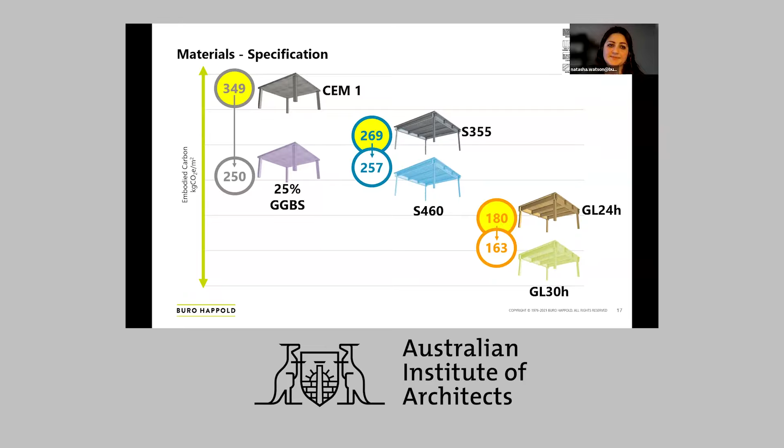Now we're looking at shallow reinforced pads. If you remember, we had a look at a thick mass pad for the foundations in the baseline. What we found is that if you make those pad footings a lot shallower and put in some reinforcement, you can show some savings in the foundations as well. This is because even though we're adding steel by way of reinforcement within the concrete, the savings in the mass of concrete that we're putting into the pad foundations are what actually give us the savings in embodied carbon that we see here.

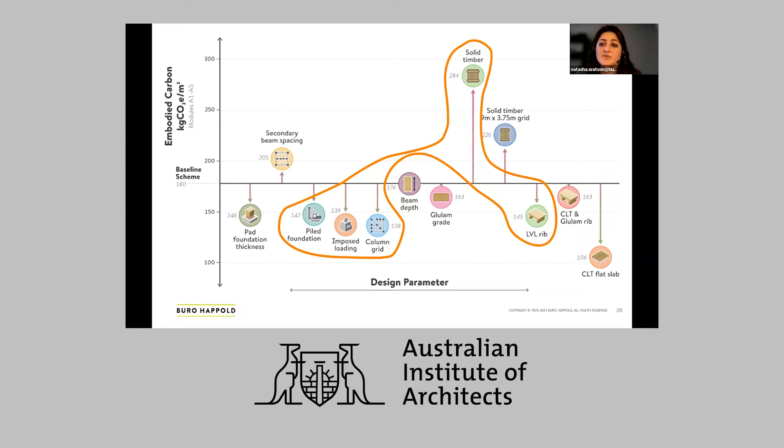So those were all quite discrete interventions that you can make, but I think the key thing is we try and put them all together within our designs, not just focus on one, but really try to look at the cumulative impacts of all of those different design decisions together.

And then what we have is a systematic reduction in embodied carbon for all of those different options, which are significantly less than our baselines. So for each of these different options, we reduced the imposed loading significantly, ensured we had 25% GGBS in the foundations, and in the case of the concrete frame, within the structure itself as well, and in the case of the steel frame, within the composite concrete deck. We also reduced the structural grid to 6.5 by 6.5 meters and really tried to minimize the amount of material we put into the structure.

So with the concrete option, we had to look at the waffle slab solution. Within the steel solution, we had a look at reducing the thickness of the metal deck to 0.9 millimeters.

And then in terms of the timber solution, we actually didn't look at the LVL solution. This is because when you look at the LVL solution, you need to put plasterboard on it to achieve that 60-minute fire rating. So what we did is we kept the grid, kept the slab as CLT, but we increased the strength of the glulam frame to GL30.

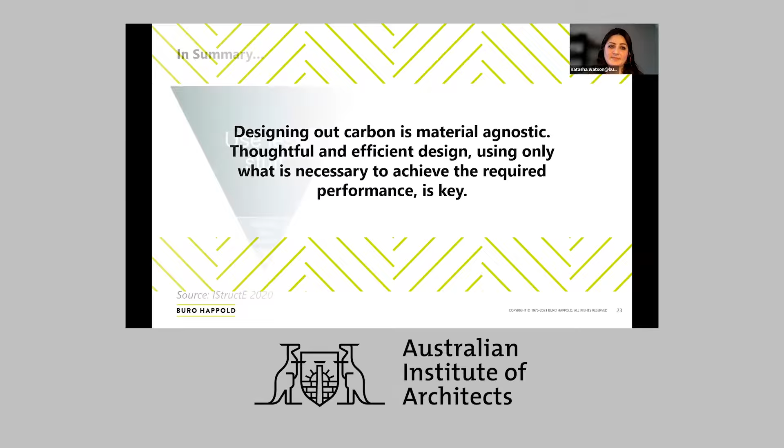In summary, I think this double triangle diagram, that's what I call it, produced by the Institution of Structural Engineers covers it quite well: use less stuff. A lot of the design decisions that I went through previously really focused on material reduction.

And as a way of focusing on material reduction, we could look at that in a slightly bigger system as well. Do you need to build as much space as you believe you need within the structural brief? Could you look at retrofitting? Could you just challenge the need for a building to form the solution for the problem you have in the first place, looking into things such as building less and building nothing?

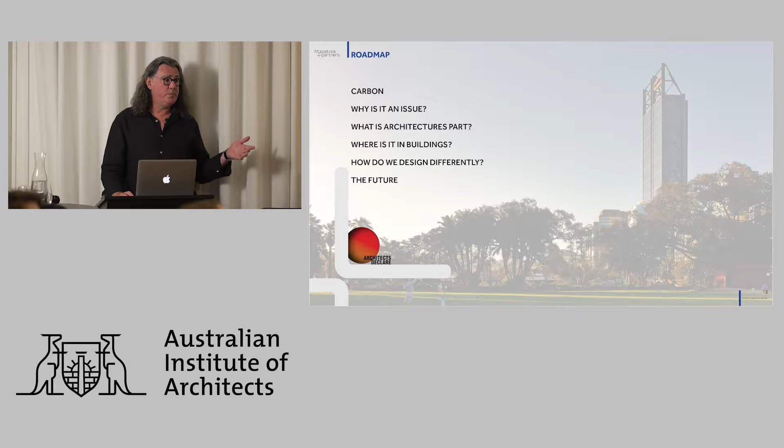So what I'm going to cover: I'll talk about carbon at the very highest level. Why is it an issue? What's architecture's part in that? Where is it in buildings? Then I'll break at that point, and when I come back, I'll talk about how we do design differently and what the future might look like, with some hints and suggestions.

Like Ross, I'd like to start with an acknowledgement of country and acknowledge the Whadjuk people and the Gadigal people of the Eora Nation, on whose land our studio at Fitzpatrick and Partners is. I'd also like to echo Ross's point about the connection to country as an opportunity for architecture to really think about its place in the world, and the connection that we have to caring for country as an attitude as to how we might guide ourselves through the next few years of quite a lot of change in the way that we practice, what we want to try and achieve, and how we understand what it is that we do.

So in that light, let's start with this big globe that flies through space. Our planet exists, and we can live here because of the atmosphere that surrounds the planet. Think of it like Goldilocks' blanket - it's just right, it's in balance, it's perfect. It allows in enough sunlight to heat the planet, and retains enough of that heat to keep us all at a temperature we're broadly happy with.

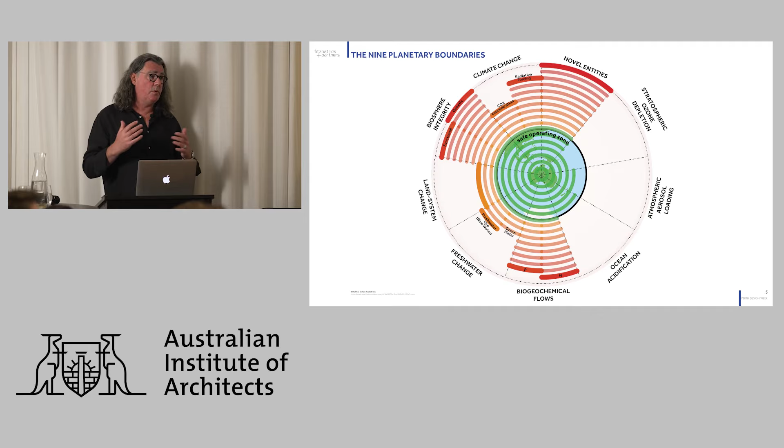The first thing is to understand that climate change is just one of 9 planetary boundaries that scientists have agreed on. This is the current state of those boundaries - the green area is the safe operating zone, where the planet's happy and we're in balance. 6 out of those 9 planetary boundaries have already been crossed, and in fact climate change is not the worst of them - we're actually way beyond on a lot of other levels as well.

So charging into the detail, and hopefully some of this is visible on the screen, this is where greenhouse gases are in everything that we do.

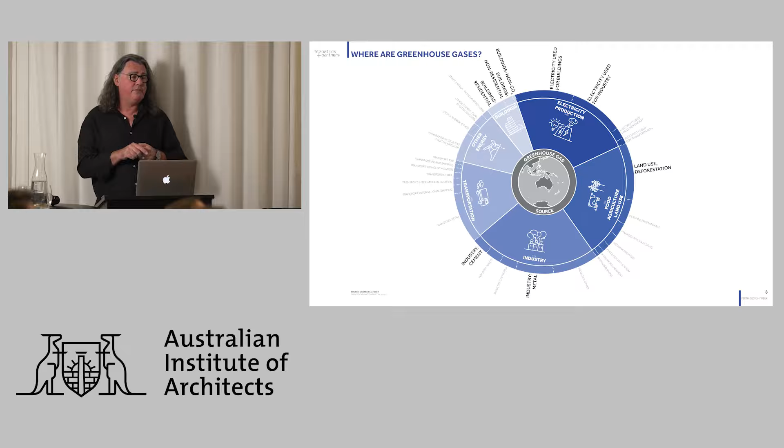That crosses energy production, food and agriculture, land use, industry, transport, other energy sources, and buildings. Buildings in that is a relatively small piece, but you need to also recognize that buildings also have an impact on about half of that electricity number. They have an impact on land use and deforestation, on industry around metal usage and cement usage in particular, and on transport. So it's really very connected.

If you take that diagram one step further, remove the land use for a second and just look at energy, you can see that about 39% of all of those sources of energy are trapped in buildings. 28% of that is what we call operating energy and operating carbon, and the other 11% is embodied carbon. The trajectory on the right-hand side is where we're headed if we just carry on, continuing to go higher and higher and getting worse and worse. We're effectively adding more and more insulation to our blanket, and what we need to do is get down to what we all know as net zero.

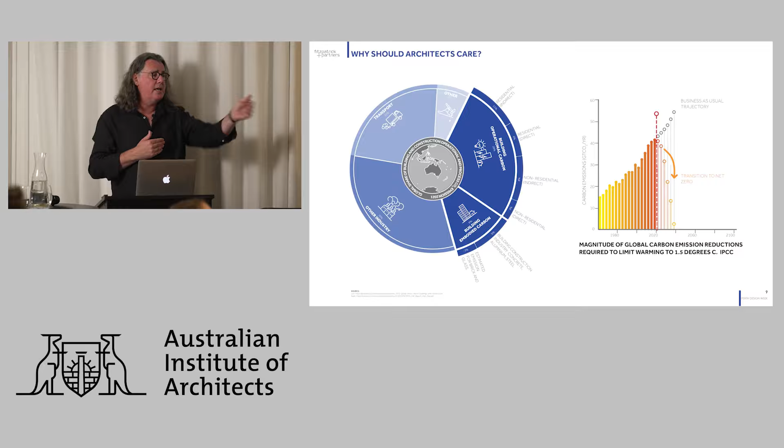That's a pretty stark and dramatic line. That's not there to try and scare anybody. I don't want anybody to feel like panic is the right approach. What we need is that pragmatic optimism to say, okay, we know where we need to get to. It's going to be a bit of a radical change, but let's set a course to where we need to be and get on with it.

So one of the biggest challenges for all of us is going to be education. It's going to be starting to develop an intuitive understanding of where carbon is and where it isn't. In part, that's going to be about learning some of the basics around what carbon is and where it is in buildings.

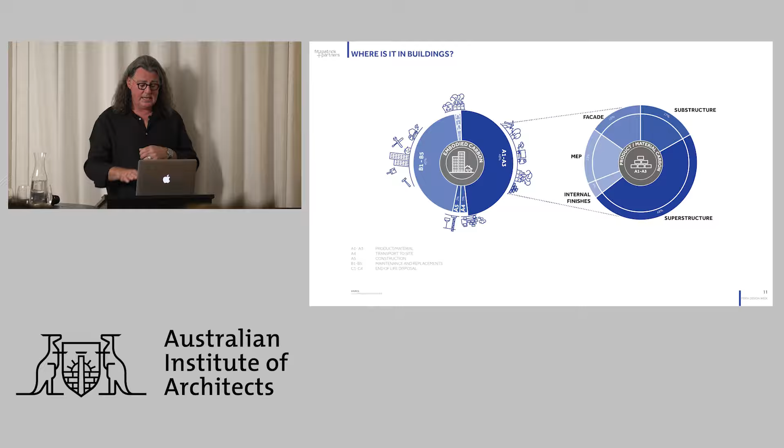And then the rest is interiors. The interiors, we can spend a long time chasing that stuff, and I'm sure we'll need to. But up front, let's deal with the big picture first, which is those structure and facade elements. And I think that's where we're going to go next.

All right, I'm going to go through kind of two broad topics. The first is tactics that we at Fitzpatrick and Partners have kind of developed for ourselves, picking and choosing from loads of different places. And the second is then some case study projects that we've run through. A lot of the same stuff, a lot of the same thinking, expanded a little bit.

First thing that will be very similar is this idea of when to do this. Ross referred to me as mathematically aware of all of this stuff. I'm very much a fat pen architect. I'm the front end of projects. I love seeing projects through, but I'm very much the front end.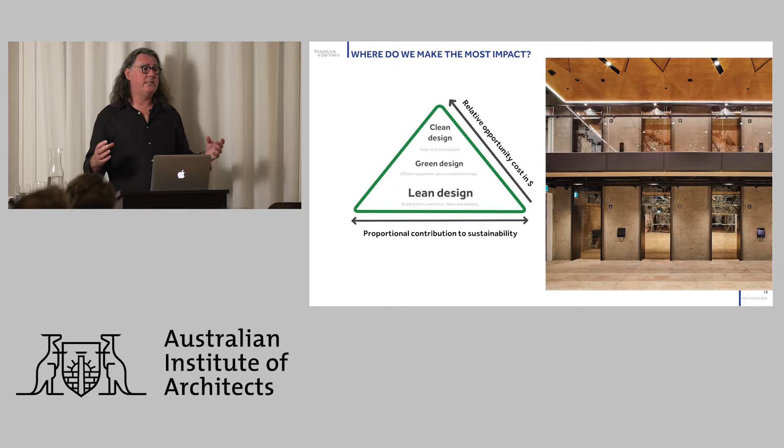This is a lean design conversation. This is not a detailed conversation. It has to happen up front, exactly like that last slide that was shared. Lean design, by the time you finish schematic design, you've baked 80% of the embodied carbon. In fact, 80% probably of the whole life carbon of a building is locked before you get to DA. So very much is a front end proposition.

Some of our strategies, the first is the most important. Question everything that you've heard, all of the numbers you saw on the page, all the numbers I'm going to show you, question everything. There's assumptions that lie behind it. It's not that people are trying to lie to you or tell you things that are wrong. They've made assumptions, they've put in place ideas based on a set of criteria, and it's sometimes not relevant to you directly. Be careful what information you base your action on.

Focus on the big wins first. That's why I'm going to talk largely about structure and envelope. Devise actionable approaches to remove or reduce carbon, and be careful of unintended consequences. Being really myopic about embodied carbon can often see you with a problem somewhere else, operating carbon, biodiversity, something else. You need to really be wary of the rabbit holes.

Build less, build light, build wise, build low carbon, build for the future, and build collaboratively. The collaboratively thing with my Architects Declare hat on is really, really important. The reason I'm here talking to you is we've got to share this information. We can't do it. None of us can do it on our own. It doesn't matter how famous or how big your practice or how many people you have working for you. You can't do it on your own.

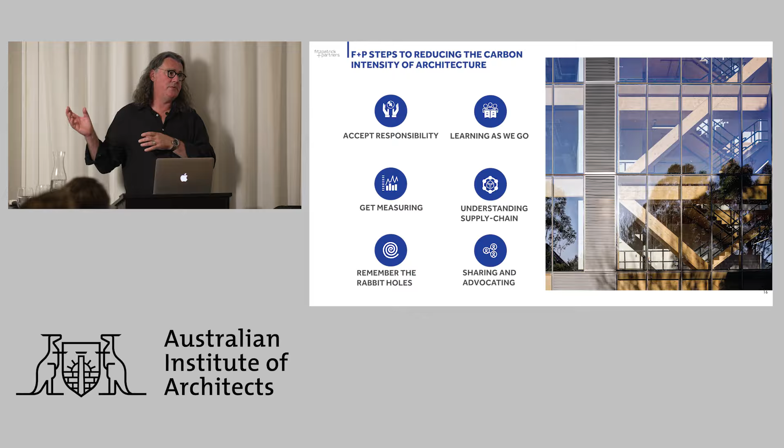Remember the rabbit holes. You can disappear down a rabbit hole, think you're doing the right thing, come back up and realize that you've created some harm somewhere you hadn't intended to. And finally, sharing and advocating. You're going to hear me say that quite a lot.

So let me dive into a case study. This is a building that we designed in and around lockdowns. So it's actually a 3-building proposition. It was a generic office development. It was 45,000 square meters all up. The first stage was about 18,000. It's in Sydney, so climate zone 5. It was 5.5-star NABERS, so pretty good. Site's a bit awkward in its orientation, 45 degrees to north, and there was a focus on optimizing carbon.

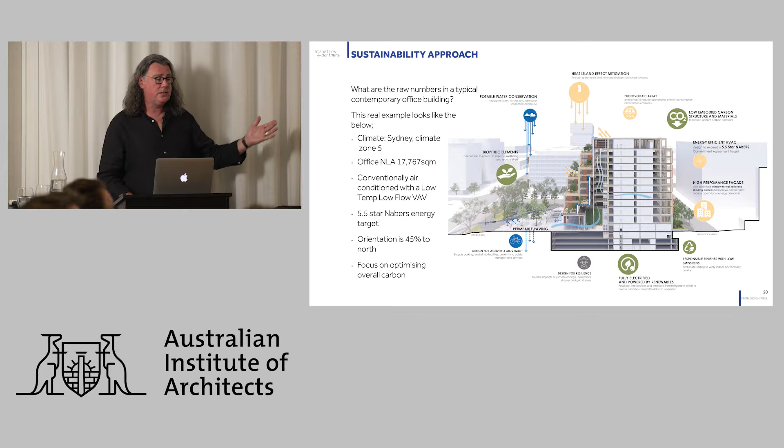We do these kind of diagrams for every project where we just highlight and show the things that are a focal point on that particular project. Some are more important than others. In this case, low embodied carbon was kind of one of the key things. We developed with Australian Architects Declare and with Sydney Uni, a student from Sydney Uni using eTool, we developed a base case option for the structure of this building.

Once we decided how big the building needed to be and where it fitted on the site and all those other things, we decided a base case scenario, which was actually a 9x13 grid with a big backspan. And then we ran an embodied carbon number on that, or our colleague at the university ran an embodied carbon number on that through eTool. And then we did a whole series of options. We partnered with our structural engineer and did a whole series of options.

So we went from 9x13 to 8.4 by 8.4, and we went from concrete to all timber, just why not? And then we went from there to timber with a concrete core, which was a bit more of a buildable solution. Option 2 was an entirely concrete solution, but 8.4 by 8.4, not 9 by 13. And then we went down some single span solutions as well. One option that went the wrong way, which was a bit of a surprise.

I guess the point here is even option 2, which is concrete, to reinforce what has just been said, the 30% saving in it by going from 9 by 13 with 4 meter backspans to an 8.4 by 8.4. Now an 8.4 by 8.4 is not very exciting, it's a pretty boring grid. And actually what it meant was we put a row of columns in the facade and we put a row of columns in both end facades, so it actually was a column less on every floor plate because the other columns had a big backspan on them. It meant that we had more solid component in the external facades, so we had our window wall ratio all starting to go in the right direction. Previous option had big backspans and gave us floor to ceiling panoramics.

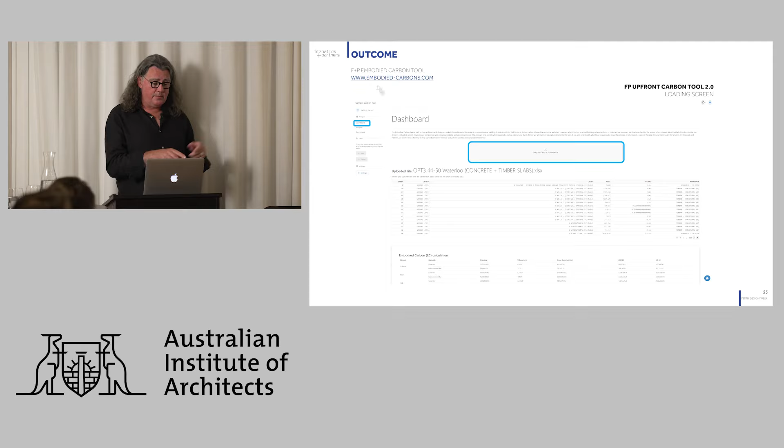www.embodied-carbons.com - go look it up, it's freely available to everybody. We use that app to be able to take data from the ArchiCAD model.

We use ArchiCAD, but it doesn't matter - you could use Revit and the same thing. Publish out a schedule, drop the schedule in here, and it immediately tells you, across internally for us, 3 different databases. On the external version, 2, because one of them is information that we don't own the IP for. So the 3 databases were Greenbook, the EPiC database, and the ICE database.

It was really interesting when we dropped it in that they all told us different numbers, and we wanted to understand why, and that's about the fact that they're all using slightly different assumptions. So that's back to my mindset of question everything - beginner's mind on all of these things. There's reasons why they're different, you just need to get into the granularity and understand them.

We then use that tool to be able to play with things like the concrete content, whether it's 50 MPa concrete or 40 MPa concrete, whether it's got GGBS in it or fly ash in it, whether you change it in the walls, floors, slabs, cores, whatever. And there's a live little dashboard there that'll tell you what changes you're making. All of that is after the grid and everything else is already set.

And the really interesting thing is all of those changes are very incremental and very small. Back to the point that was made earlier, the grid, the efficiency of the structure is the biggest thing that you can do. And that's not rocket science, that's just volume, right? How much of a material have you got? How heavy is your building?

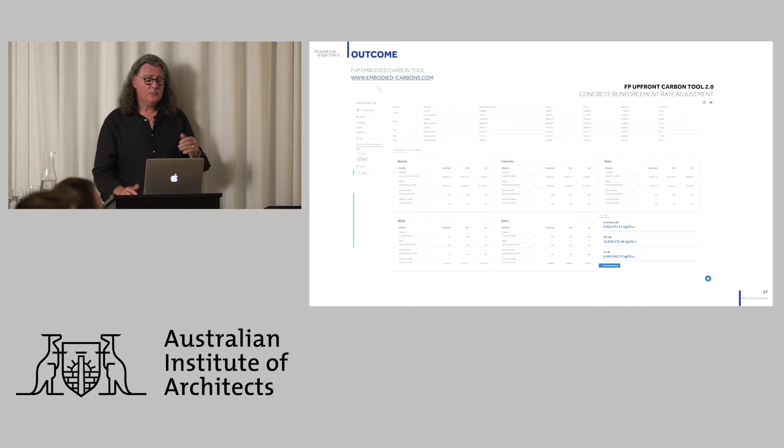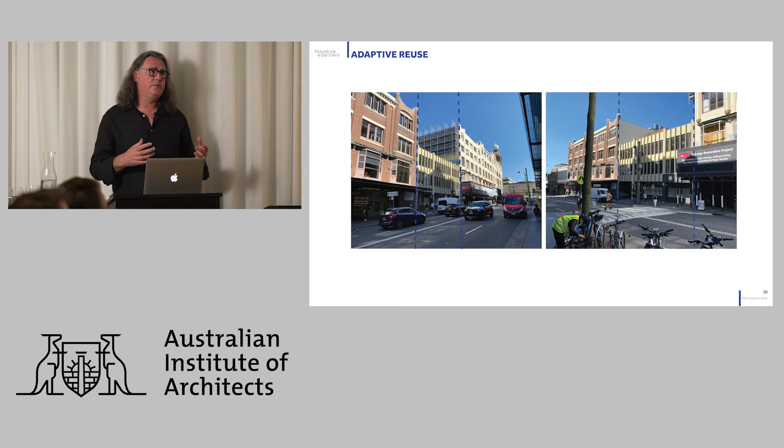We wanted to do this for embodied carbon reasons. The client was open to the idea, but wasn't totally committed to it. What got them across the line was that because we kept the existing 1960s building with relatively tight floor-to-floors, we were able to sneak an extra floor on top, gaining about 750 square meters. Our client said, golden, thank you very much, we like that.

That led us to two things: one, we kept the existing concrete and the existing floor-to-floors; two, we built on top in timber, which was lightweight, meaning we needed to reinforce the foundations less. As we've gone on, we've found we're still having to create some foundations, but we didn't know that at the time.

The bigger saving by far is that we kept the existing building slab below. So anything you can do to keep a building and build on top won't necessarily save you money, but it will save you carbon for sure. Reusing the existing lower 4 levels of concrete saved an even greater amount.

This is the other reason I'm in Perth at the moment. Great client. This is a carbon case study as a very small piece of a much bigger pie.

This is a project doing the Living Building Challenge. I'm sure some people in the room will know it - it's Green Star on steroids, for want of a better proposition. It's about as complete a sustainability framework as you can get, crossing over everything from place, water, energy, health and happiness, materials, equity, and beauty. Beauty codified in a ratings tool is an interesting conversation, but it does exist.

The point I want to pick on today is the embodied carbon footprint of the building and what we did in relation to that - that's today's topic. The building is also producing 105% of its own power on site, and it's going to be 100% water sufficient. The performance of the building envelope is nuts, which has radically lowered the amount of energy necessary to heat and cool the building.

We're overall aiming at about an 80% reduction in embodied carbon, which is really significant against a benchmark. Again, always be cautious when you hear numbers, particularly percentages thrown around, but it's true, trust me. We're also reducing the amount of cars involved in the project, encouraging people to use public transport and cycling.

We've got 10% of the roof of the site area given over to urban farming and urban agriculture. There's a whole pile of additional elements - there's actually a 2-day workshop I'm in the middle of, which I just stepped out of to come and talk to you today about all that.

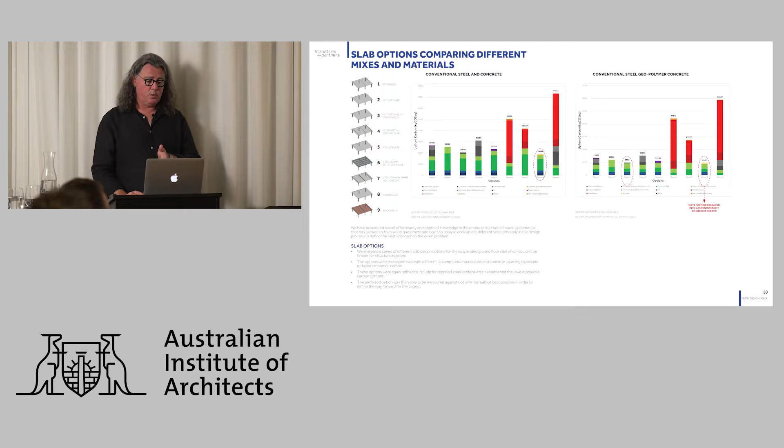That was the bubble deck solution in option 8. When we went from conventional steel and concrete to conventional steel with geopolymer concrete, that number dropped from about 20,000 to about 10, just under 10. Then the other option that became available is option 3, concrete with pedestals. We then went to what happens if we use recycled steel and geopolymer concrete.

So we got all of our materials ducks in a row. What does that then end up with? The lowest we got to was about 7,000 kg for that same slab, but we ultimately didn't do that because the recycled steel couldn't be certified for structural reuse.

So we ended up at 9,000. But ultimately, the solution for the slab was less than 40% of the conventional approach, and only 13% of the worst solution out of all the apples-for-apples options. It's still 30% more than the lowest carbon option because we couldn't get that steelwork to work.

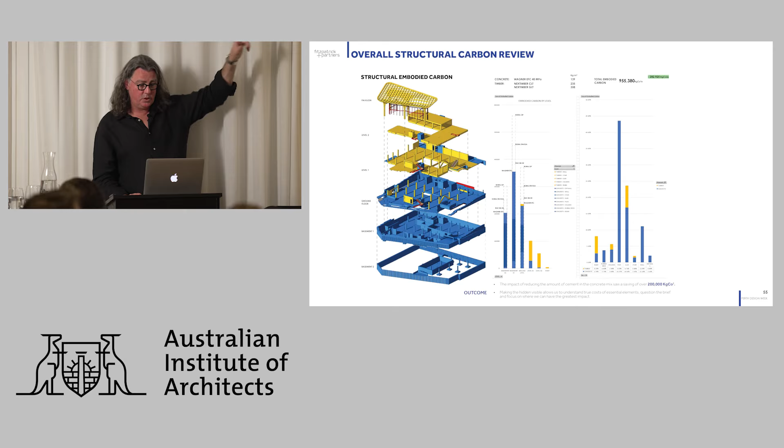And basically this is about—I don't care what the number is. The number is not important. Which way are you going? Are you going down? Keep going. The goal is zero, you won't get there—that's okay, just get going towards it.

This building also has a lot to do in material circularity. This is talking to some of the material propositions we've got going on: avoid using additional materials where you can—so don't use, or reuse or recycle product, either reusing material from the site or using recycled timbers, etc.

Using biogenic materials, so anything that stores carbon—and yes, there's an accounting question about whether you can or can't count it, but don't worry about that, it stores carbon, it's better than something that emits carbon. Simple: lots of biogenic materials, lots of local materials in the building.

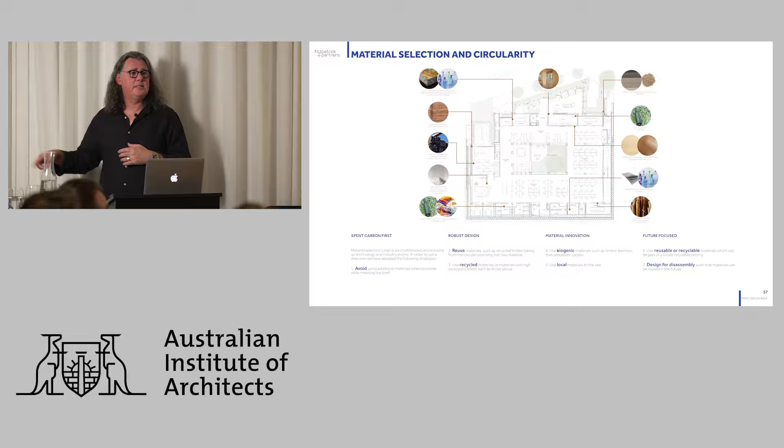Where you have to use something like aluminium—unfortunately we couldn't get away with a timber facade—you ask how reusable, how recyclable it is. If it can't be circular on the way in, can it be circular on the way out? And the last of those is really important: design for disassembly, meaning the building has a life after you're finished with it, or if it needs adaptation, that can happen without throwing everything in the bin.

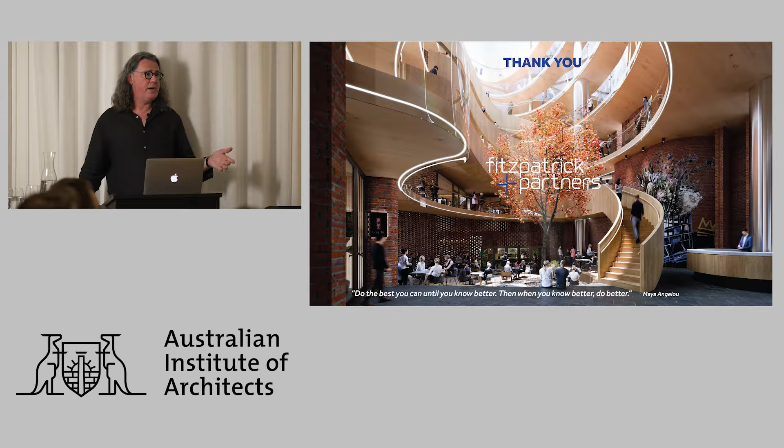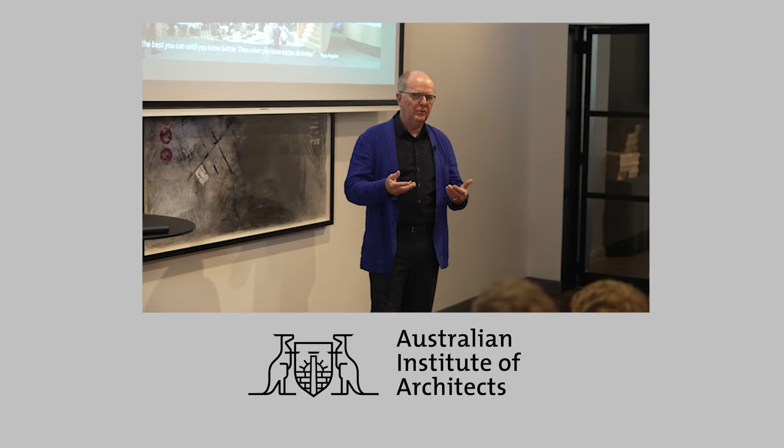Thanks, Paul. Just in terms of meeting the requirements of Living Building Challenge in Perth rather than in Sydney, can you speak to some of the challenges of, say, finding locally sourced materials or anything else that's been particularly hard?

Yeah, so we've managed to get Living Future Institute to extend the boundaries. For those that don't know, one of the things in Living Building Challenge is to try and get a percentage of your materials, 30% within the first zone, another 25% in the next, and then the remainder. Those zones are, for Perth, from here to the border maybe. Then the next one is all of Australia, and the next is most of Asia, and then the rest is the rest of the world.

Finding local materials is a bit of a challenge, but strategies like using material for the concrete from the site help - the concrete was probably going to come anyway, but it's a great additional narrative. And LBC is a process-focused proposition more than an outcomes-focused one. It still wants the outcome, but it's very much about how you went on the journey.

We've actually, through the LBC, expanded those horizons. The first zone, because Perth is so isolated, gets you more or less to the Victorian border, so it can include South Australia, which we did strategically for timber supply. The second one gets you all of New Zealand. The third one gets you all of China.